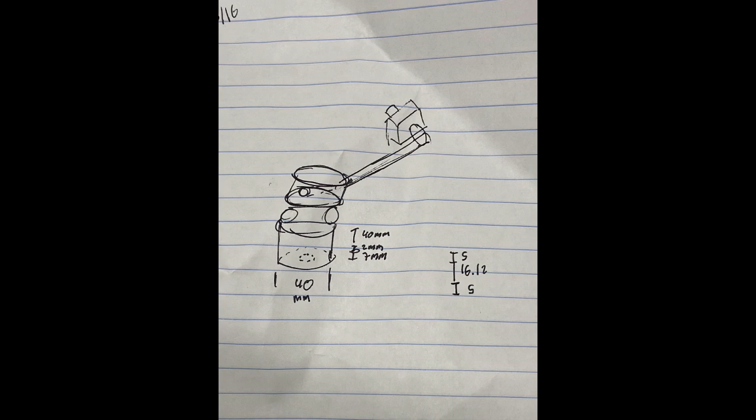To start, I drew this beautiful image, and it very roughly shows my idea. This is my tripod, and I first started by removing the head of my tripod and then measuring the threads. And I found this sheet music stand at Goodwill.

As I only needed the telescoping arm of the sheet music stand, I proceeded with scoring the plastic collar with a utility knife and using this as my cut line. I used a mini hacksaw to cut through most of the collar, then broke the rest with a screwdriver. I repeated this process on two sides and finally broke through and released the telescoping portion of the music stand.

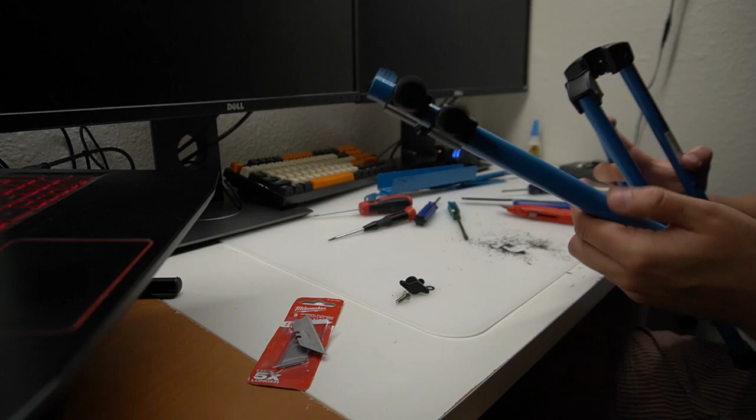After this, I took measurements of the largest diameter telescoping arm to get the diameter for the portion of my drawing that will hold this part. I also measured the width of the end portion of the music stand for holding sheet music.

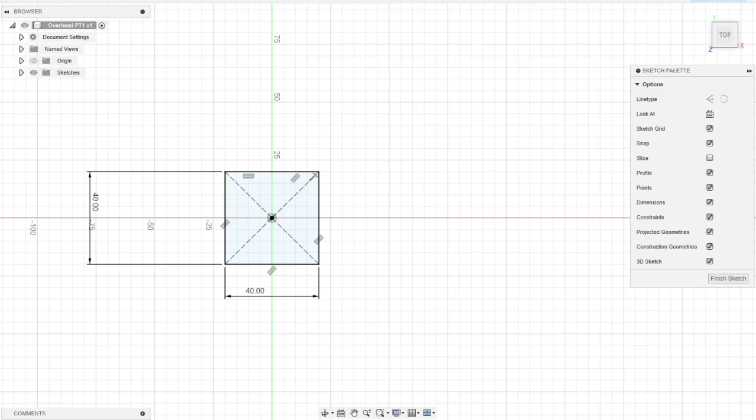I opened Fusion 360 and first designed the base component that screws onto the tripod. From this, I decided to copy this drawing and make the tripod telescoping arm component, which I decided to be jointed.

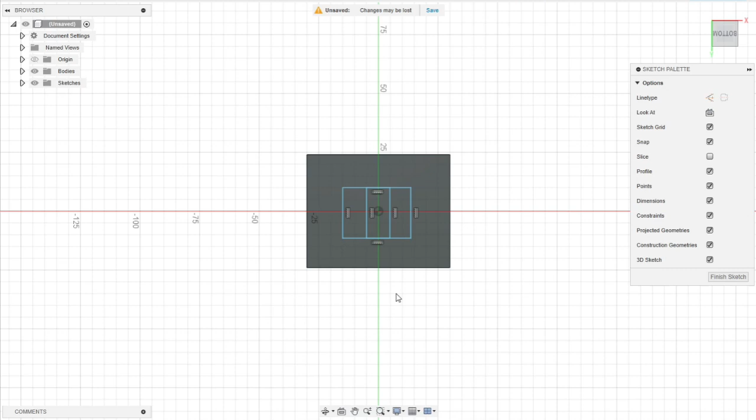I then started to design the end portion that holds the camera with a 1/4 inch by 20 thread bolt.

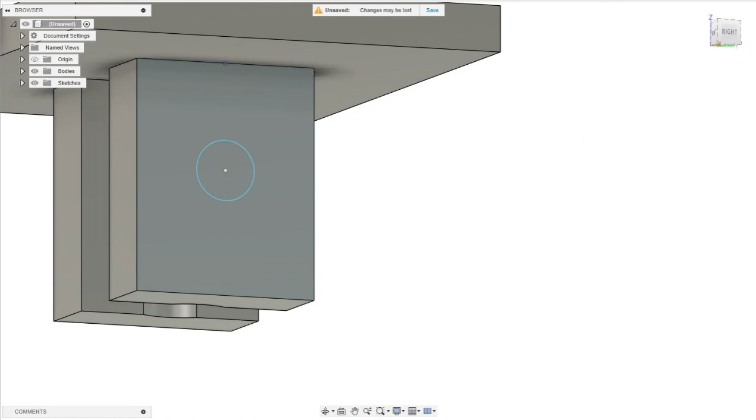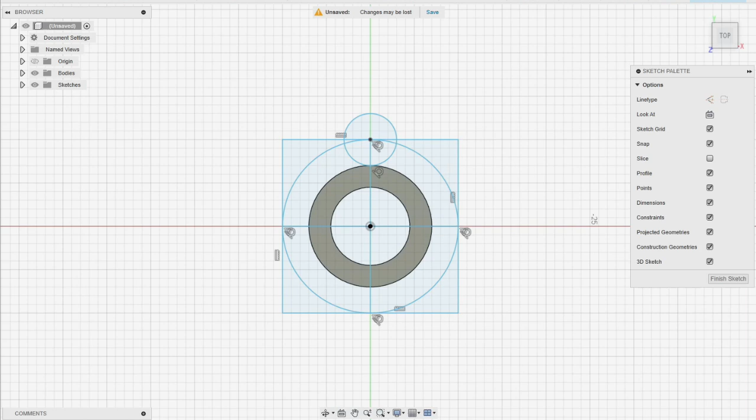I also designed grip components for the bolts that I would like to adjust by hand. This mainly applies for the telescoping arm holder. And just as an FYI, these components did go through some design revisions, specifically for adding nuts to the telescoping arm holder.

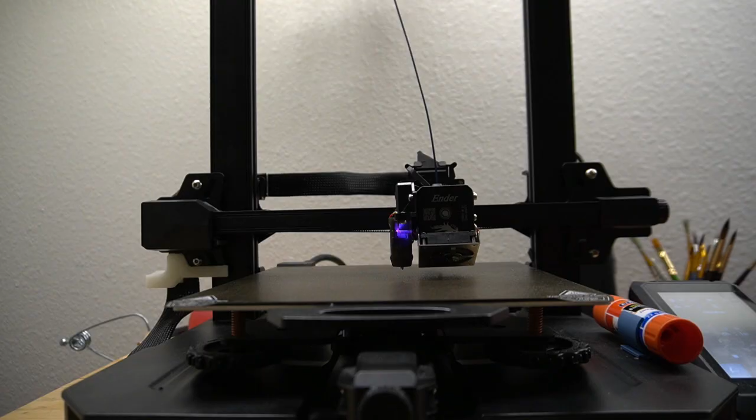After printing, like anyone who 3D prints, I had to sand and make the parts actually look good.

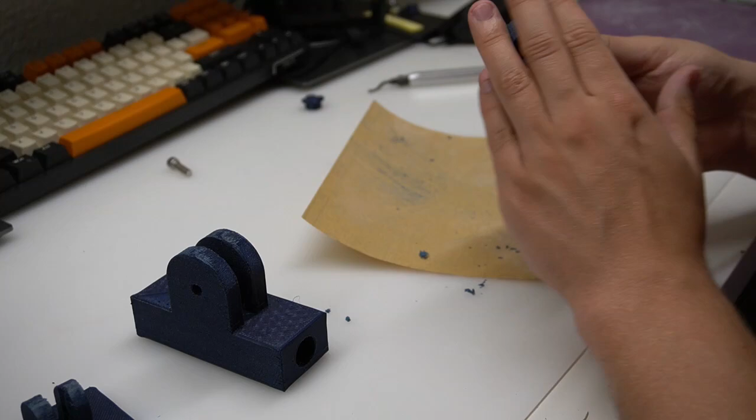This is another item that I did not show designed in CAD, but the components for the camera and the tripod did not have enough grip, so I added TPU items to hold the camera and the mount to the tripod.

I use super glue to combine the two components together.

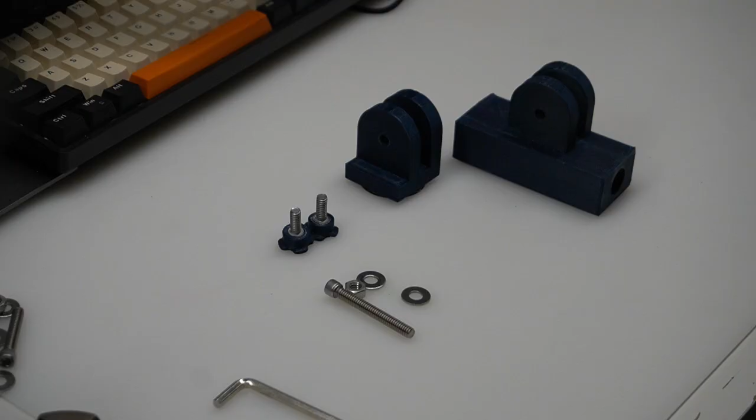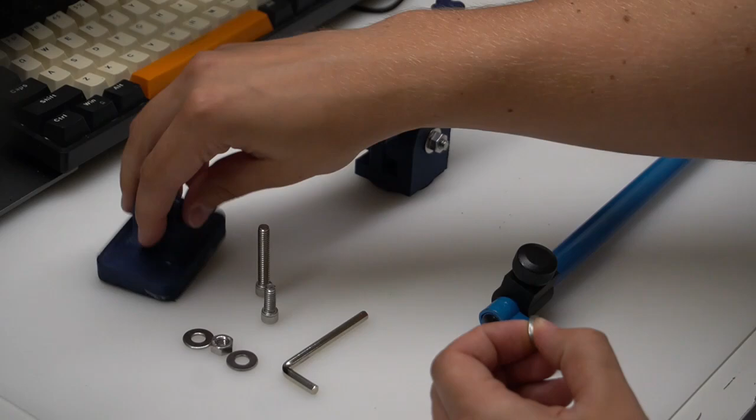After all of my revisions of 3D printing and assembly, I was actually able to combine the tripod mount component and the telescoping arm mounting component together. After completing the portion that actually holds the telescoping arm, I was able to assemble the portion that holds the camera to this mount.

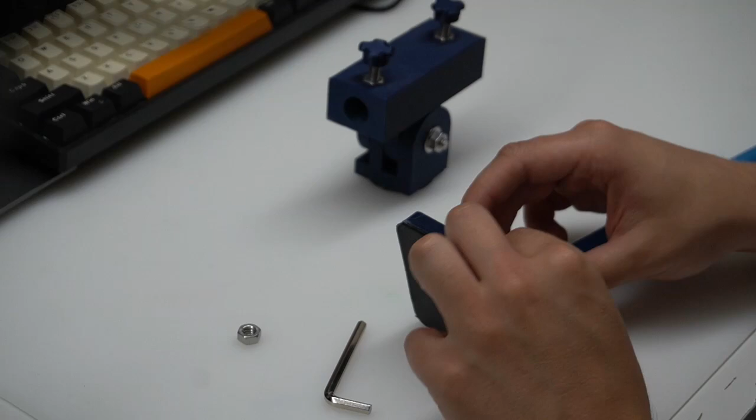This is the full C-mount / overhead camera mount stand, completed with counterweight. Finally, the piece de la résistance. Now I am able to create amazing overhead shots of masterful drawings.